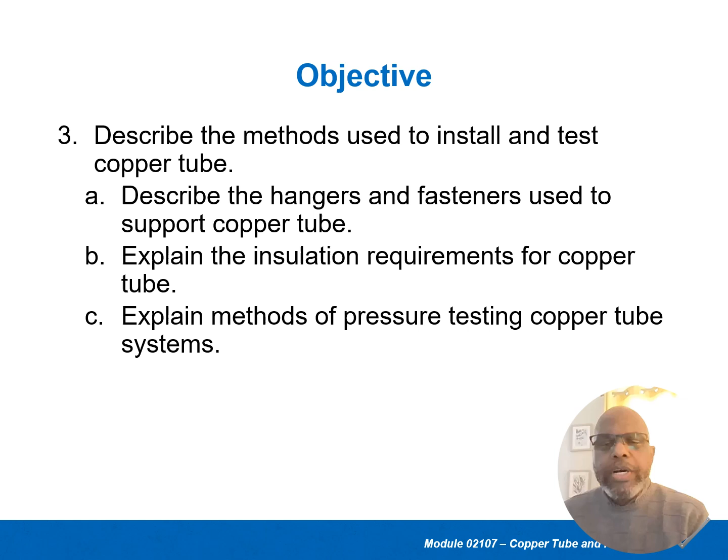And it will be a performance test. We're going to install some piping to go through the process: how to size up, how to prepare the pipe, how to support it and install it inside of walls.

First thing, all tubing must be installed and supported so that both the tubing and its joints remain leak-proof. It must not leak. The worst thing you can have is a water leak inside of a wall after the wall is finished, because, number one, it's hard to find where the leak is coming from, and it's enclosed, making it hard to get into to make repairs. Usually it's surrounded by flammable materials that can catch fire.

If you do it right the first time, you save yourself a lot of problems in the long run. So copper tube is supported in a variety of ways and with various sizes of hangers and supports. Every pipe size has its own special type of hanger to support it based on the size.

We don't want piping moving around in the wall. We want to support it correctly and sturdy, so it's not going to put tension on the pipe, which can cause it to be damaged from the weight. So supporting all types of piping is important. We just don't run the piping without supporting it.

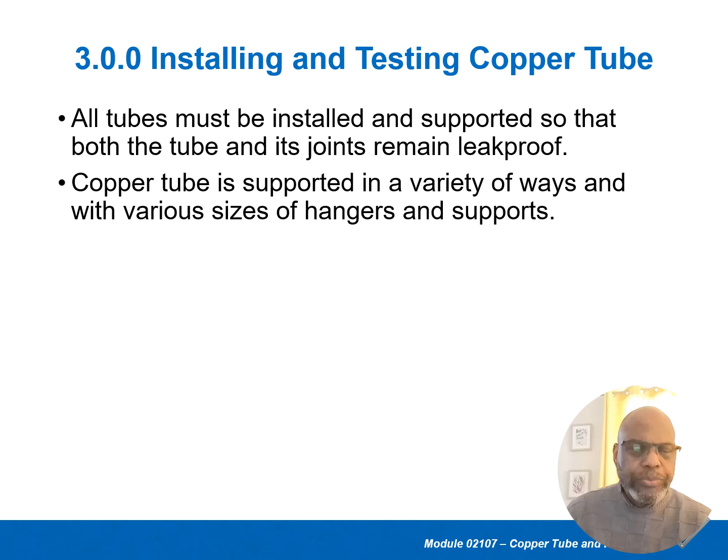When it comes to hangers and fasteners, a hanger is something that's supported and suspended. Fasteners are what could be attached to walls or floors or things like that.

The specifications for hangers and supports are determined by the following factors. First, the combined weight of the tubing, fittings, and valves. In other words, if you are putting in a very large or heavy valve, the supports need to be closer—close to the fitting or close to the valve—to make sure we're not putting stress on the piping.

Next, the maximum weight of the content that the tube is carrying—if it's water, oil, or whatever is going through that piping, or waste. Now, water is heavier than most people think. A gallon of water weighs over 8 pounds—just 1 gallon, over 8 pounds. So if we know how much weight is in that pipe, based on the length and size of the pipe, we can determine how much weight that pipe is holding, and so be able to support it.

Materials such as wood, concrete, or steel that the hangers will be attached to matter. In other words, we determine what type of hangers we're using based on where we're attaching it. If it's steel studs, we need to use a certain type of hanger. If it's hanging from floor joists or ceiling joists, we must use a certain type of hanger or support.

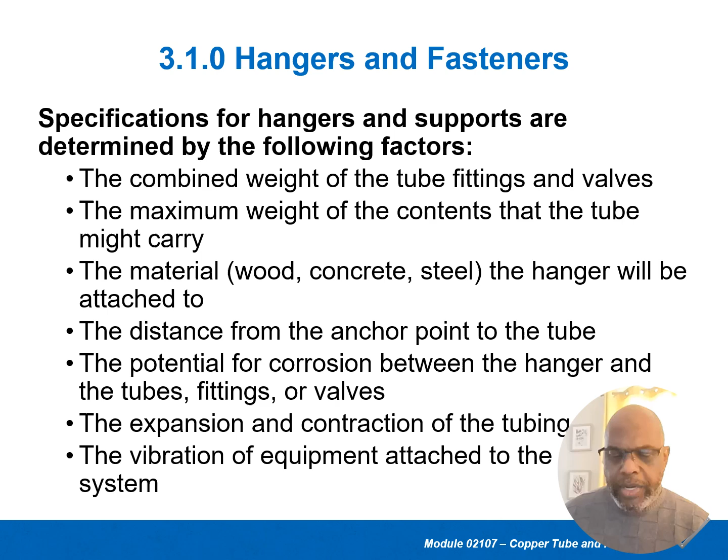Vibration of the equipment attached to the piping system must also be considered. If it's connecting to a piece of equipment that requires water or some flow through it, we must account for that. For example, for refrigeration systems that have a compressor, we actually put extra bends in the piping to allow that compressor to move freely without being hindered by the piping itself, so we're not putting stress on the tubing that can crack or break from vibration.

How do we attach it? Number one, these are different types of clamps. The C clamps don't support the pipe or tubing itself, but they support the hanger that is supporting the tubing. These are what we call beam clamps or C clamps, and they're used to attach a threaded rod or a bolt and nut to hang some type of support from it.

The support on the right side is a one-hole strap. That one-hole strap is designed to hold the pipe against a wall or some type of structure, or a stud. In other words, it supports the pipe using just one screw through the strap, and that strap holds the pipe in place against a surface. The tube is attached to a part of the hanger that touches or connects directly to it. It may be designed for heavy duty or light duty, for covered insulated tubing or plain tubing.

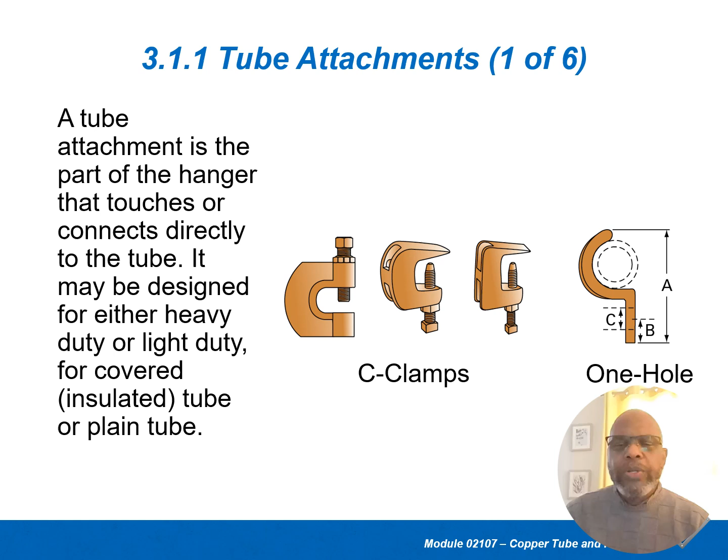So again, there are many ways to attach it, but this diagram shows a couple of different ways to do it. Like the C clamps, it doesn't hold the pipe directly—it holds some type of hanger that will support the pipe, and that one-hole strap will support the pipe directly.

These on the left side we call clevis hangers. We use this for larger pipes—matter of fact, they make it for smaller pipes too, so it's not just large pipe. Usually at the top of it, this is where your threaded rod will go, and that threaded rod will be connected to one of those C clamps, which we call beam clamps.

So that rod could be 10 feet long and hanging from a beam, and this is what holds the pipe. The pipe sits inside this space, and it's movable—it's not holding the pipe solidly or secured. In other words, the pipe can actually move back and forth a small amount if there's expansion or contraction. We use this when we hang a pipe above the ceiling, above your head.

This is a very common type of clamp. If the pipe is insulated, we just use a larger clamp that fits around the insulation of the pipe. Again, it's not physically holding the pipe stationary—the pipe can move back and forth slightly if there's any vibration or expansion or contraction of the piping.

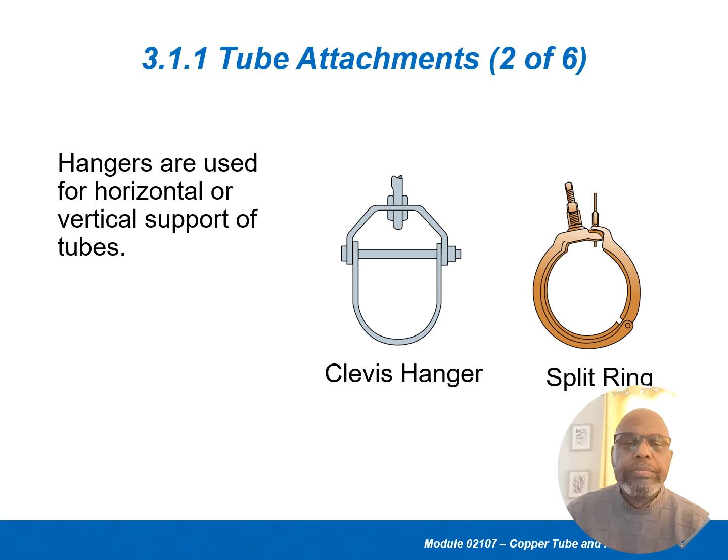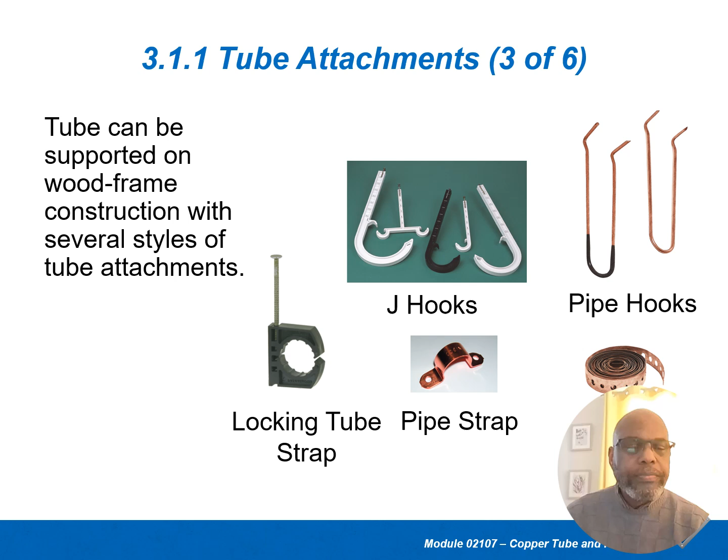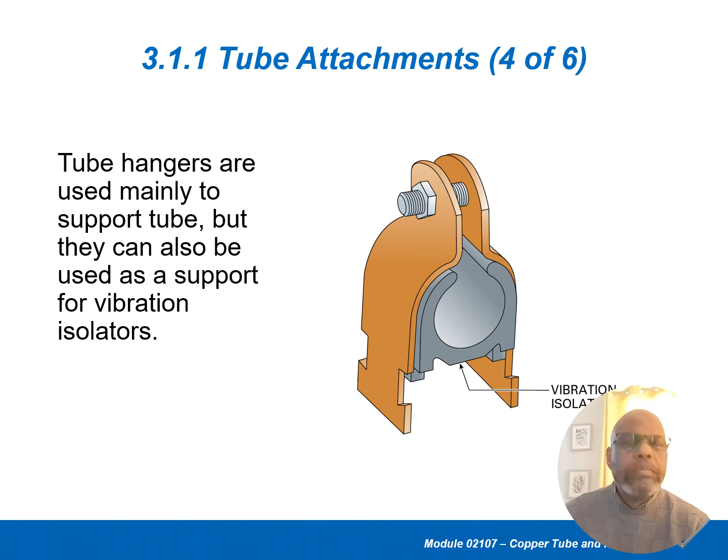Now this is another type of clamp you find. This is a vertical hanger, and basically it straps around a pipe. It's usually used when the pipe is vertical, going up and down, and it will support the weight of that pipe instead of forcing the weight at the very bottom, which can cause a lot of stress and can damage or crack the pipe.

So this will clamp around the pipe and hold it, and you can use these ears on the side of it to be able to hold that pipe in place. So again, you size these type of straps based on the pipe's size, and they make a different clamp for every size. It will use bolts and nuts here and here, and once you close it up all the way, it will hold that pipe tightly. So it doesn't matter how large or heavy that pipe is, it will be supported around using that clamp, not the weight on that fitting at the very bottom.

So vertical hangers are also called tube riser clamps. They consist of a friction clamp that can be attached to structural site components to support the vertical load. The load is the weight of the tube. Again, there will be some type of support underneath one of these ears.

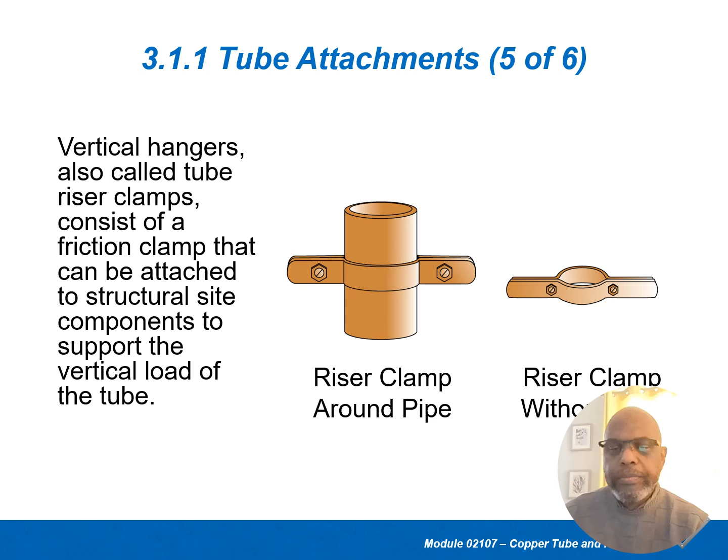Here's another one. This is definitely found in refrigeration systems, and it's a special type of clamp. It looks very similar to a clamp that you would use on a unistrut system, only different. This doesn't have those clips on the bottom to support it. Other tubing attachments include universal tube clamps and standard clamps, but it has these channels and things that we use. That's the unistrut I was explaining, which will support the piping.

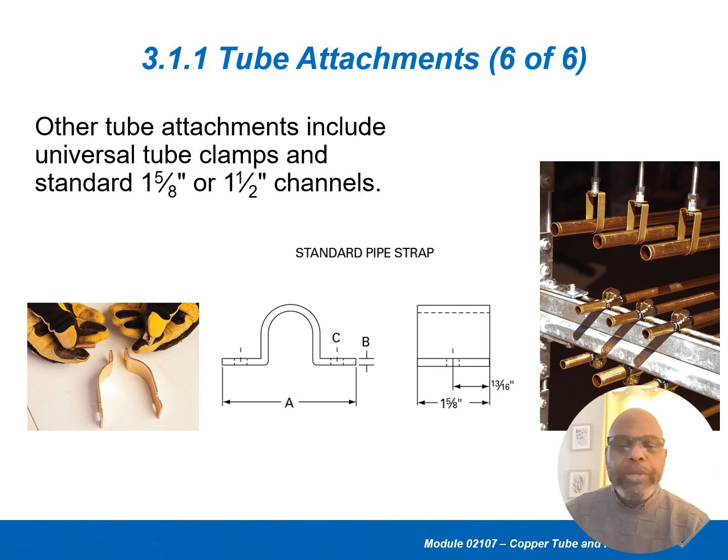Here's another one. This is like a clevis hanger that goes around copper pipe. It's copper clad, covered with copper, so it doesn't have that electrolysis. This is definitely from a refrigeration system, for example a supermarket refrigeration where they have what we call a rack system, and all the piping, multiple pieces of tubing, sets of tubing, will be coming out of this system like this.

Connectors. The connector section of the hanger is the part that links the tubing attachment to the structural attachment. Again, we're talking about the unistrut. I'll see if I can send a video about unistrut and how to use it, because that's a common thing you'll find in commercial applications. I'll go through the steps, and hopefully the video shows more. So the connector section links the tube attachment and the structural attachment. The structural will be the strut.

Connectors can be divided into two groups: rods and bolts, and other rod attachments. We're talking about the threaded rod. The rod attachment includes eye sockets, extension pieces, rod couplings, reducing rod couplings, hanger adjusters, turnbuckles, clevises, and eye rods. All of these are different things for threaded rod connections used to connect everything together. There are many different parts. The video about unistrut may show you all the different configurations of components you can use.

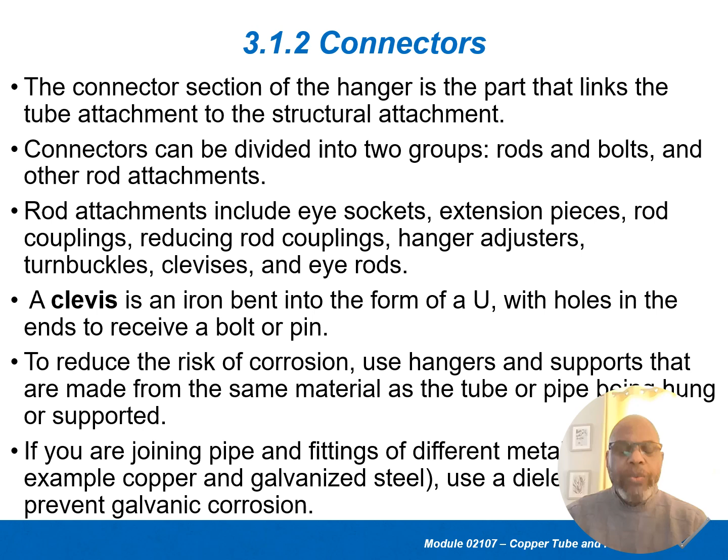If you are joining pipe and fittings of different metals, for example copper and galvanized steel, use a dielectric union to prevent the corrosion that will occur on the pipe.

Here are different types of clamps you can use. For example, these are concrete anchors. Here's toggle bolts - here is the head of it. Basically, we buy these and add the length of screw that we need, and usually the screw is long. It's long for a reason, because when you fold this up, it has to penetrate the drywall.

This, like I said, I call it a butterfly. You can fold it up so it's flat against the bolt, then slide it through the wall. Once it goes completely into the wall cavity, it pops open - it's spring loaded - and then you can tighten the screw up. So that bolt must be a lot longer than you need.

Other types include these plastic toggle bolts. This is a lead shot - a drop-in that you actually drop into the drilled hole. You drill the hole exactly the size you need, then hammer this nail in and it will expand and hold it down into concrete. It works very well; we usually use it on concrete floors.

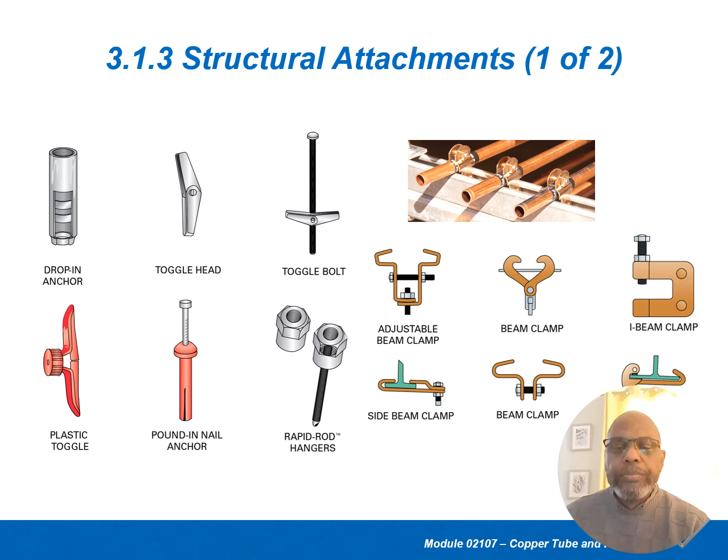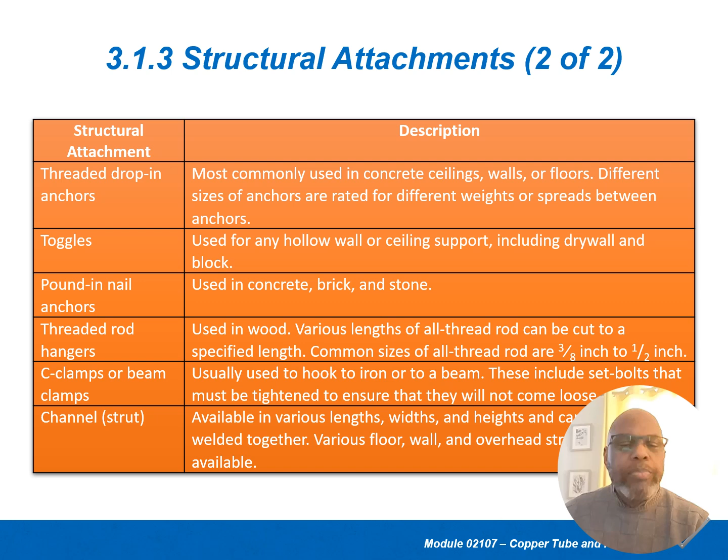So there's a list and a little chart that goes into the structural attachments and the way to install it, the purpose of it, and the application to use it for. Study this chart - it's in your book. Go through it so you get a good idea of the processes of different types of supports.

One thing we have to do with copper, especially when we've got things at different temperatures, is insulate the tubing. If something is very warm or very cold, it should be insulated. If you need something warm, insulating the pipes maintains the temperature so when it gets to where it's going, it's still holding its temperature. Same thing with something very cold.

However, with something cold, it can freeze up or sweat, and that can cause problems because it can drip and cause floor or ceiling damage. So we insulate the piping for two reasons: for cold, to keep it from condensating and gaining heat, not losing heat. When the pipe is cold, it would actually absorb heat, and when it gets to the finished end, it'd be warmer than you want it. But something very warm would lose heat, so the insulation allows it to maintain its temperature.

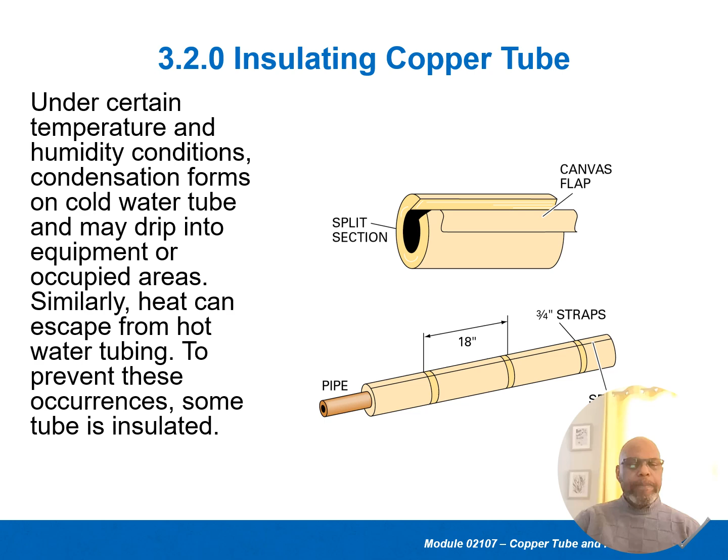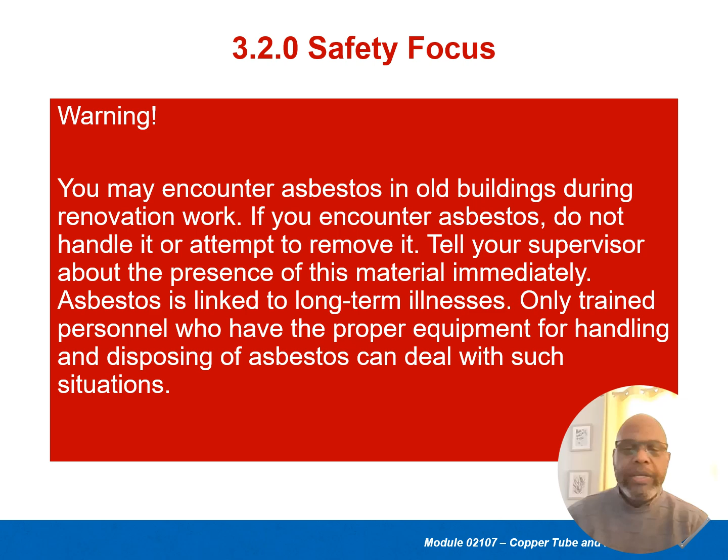Safety focus. Here's a warning: you may encounter asbestos in old buildings, especially during renovation work. If you encounter asbestos, do not handle it or attempt to remove it. Tell your supervisor about the presence of this material immediately. Asbestos is linked to long-term illnesses and lung diseases. Only trained personnel who have the proper equipment for handling and disposing of asbestos can deal with such situations. In other words, you'll call a company out to handle that. If you haven't been trained in it, don't deal with it because it's not safe for long-term health.

Now, once you install the piping, did all the soldering, and the pipes are supported, before you put it into use you must test it to make sure there are no leaks. Typically we can use either air or nitrogen to pressurize the system. We never, ever use oxygen in a pipe to check for leaks. Number one, oxygen is an accelerant—it can cause anything that is burning to burn more rapidly and violently. Matter of fact, breathing pure oxygen is even not good for you.

Once an installation is complete, you must pressurize and pressure test the system for leaks to be sure all connections are secure. The system must also be inspected to make sure the work has been done according to job specifications and applicable codes. Matter of fact, that should be done before you pressure test the system—in other words, it should be inspected, checking your joints. Every time you make a joint, you need to inspect it. You get a mirror and a flashlight and go around your fitting to inspect it and make sure it's done correctly.

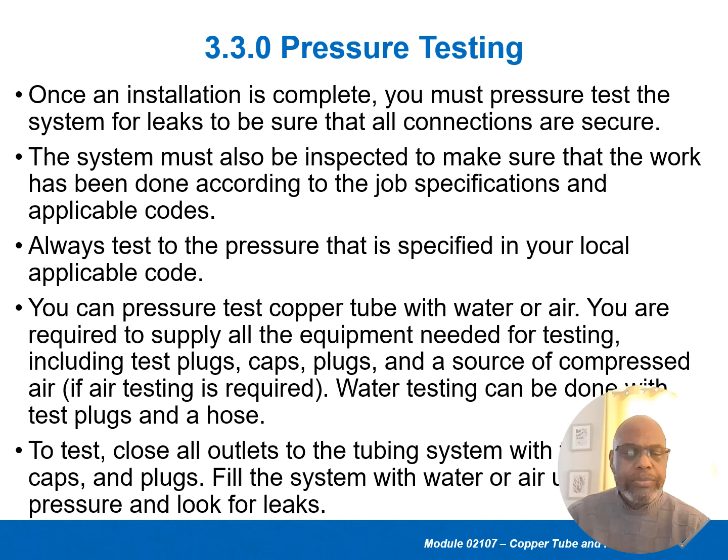Pressure test for DWV systems. You can water test it, but that might be more difficult because the DWV piping is large. It would take an awful lot of water. It's easier to use compressed air.

But to water test a DWV system, refer to your local codes for the required pressure and water head. Again, you have to add an awful lot of water to be able to do it. Here's the thing, you don't have to cap the very end of it, as long as you didn't complete the final connection. You can add water to it, make sure everything is stubbed out. When I say stubbed out, the piping where your sinks and toilets and things is closed off, capped off, where no water or pressure can escape.

Then you can fill the stack pipe, the pipe going outdoors, and you actually raise it up to a certain height, and you have a pressure gauge at the very bottom of the system, and you record that pressure. The vertical rise in a water tube will give a pressure reading.

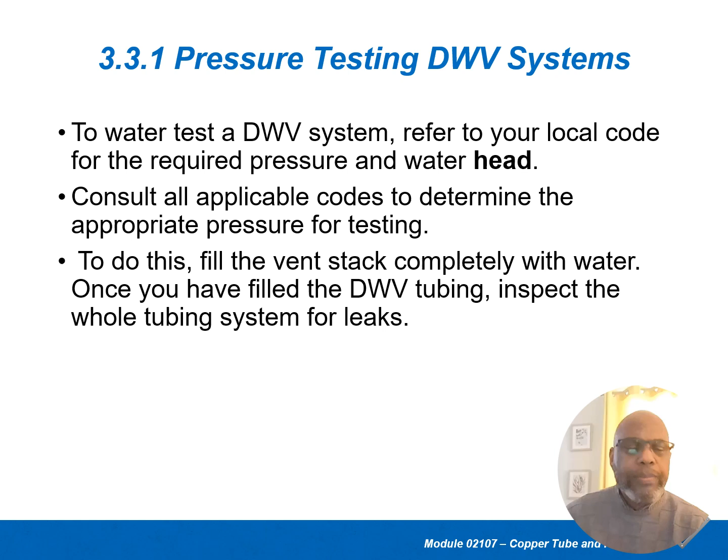So, pressure testing a water supply system. To water test a water supply system, close all the outlets, all the valves, and fill the system with water from the main.

Next, you're going to inspect the system for leaks or other problems. Where codes specify water testing at pressures higher than those available from the normal water system, which is around 45 to 55 psi - that is normal for a standard supply water system - but they want you to test it at 100 psi, because you will be able to find leaks faster. The higher the pressure, the faster you will find the leaks. That's about twice as high as the city will supply you.

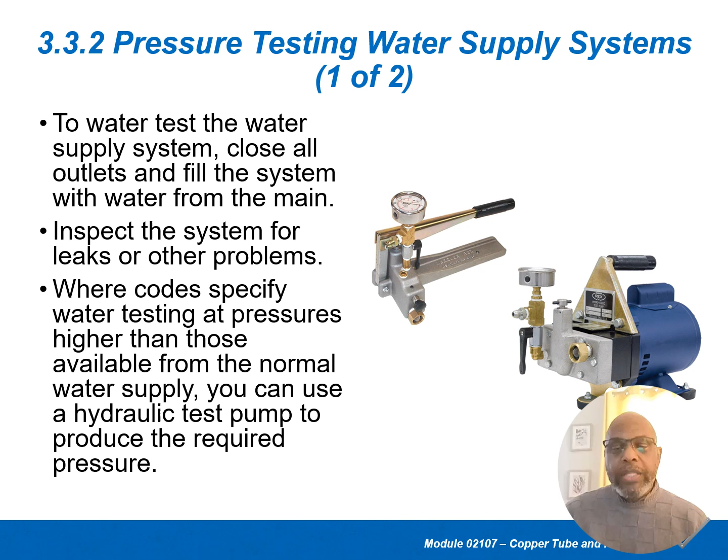So where the codes specify water testing at pressures higher than those available from the normal water supply, you can use a hydraulic test pump to produce the required pressure. Basically, if you notice, this one here has a gauge on it. You just pump it up, and this is an electric pump that can increase the water pressure for you.

To air test a system, the plumber or inspector fills the tubing with compressed air. By using a pressure gauge at the test plug, the plumber or inspector can determine if any pressure is lost somewhere in the tubing. Keep this in mind: you can find a leak faster with compressed air than you can with water, but you can find it either way.

Another useful method of identifying leaks, if using air, is soap bubbles. Every joint is covered with soap bubbles, and you will find a leak instantly. So if there is a leak in the joint, bubbles will form at that point. And here's the great thing about it: you know exactly where the leak is at. That's why I like using air, because you can look for water leaks, which is a telltale sign too. With air, you can use bubbles.

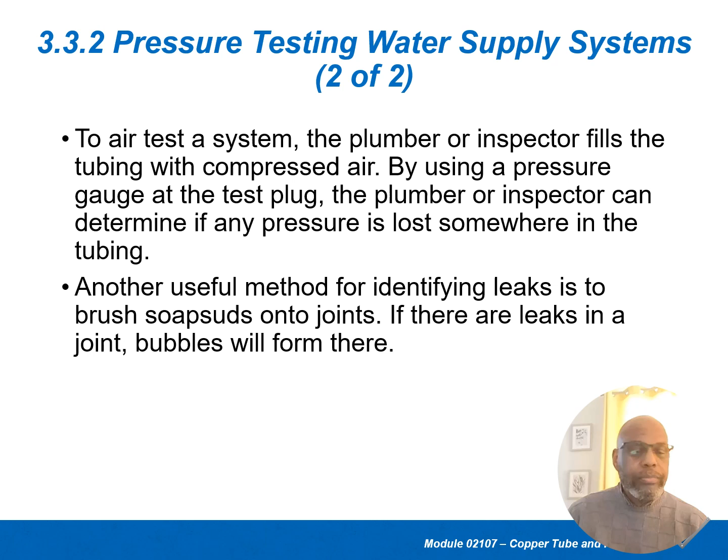All right, here's some terms that we're going to go over. A clevis is a type of strap that is a U-bend. Insulation is a substance that retards the flow of heat, in other words, slows it down for either gaining into the pipe or leaving the pipe.

Head: a head is basically the vertical rise in a column, which causes a downward pressure. So again, for every pound of pressure, that would give us around 27 inches of vertical rise. In other words, if you push water up, or you have 27 inches of vertical rise, that will give us 1 pound of pressure.

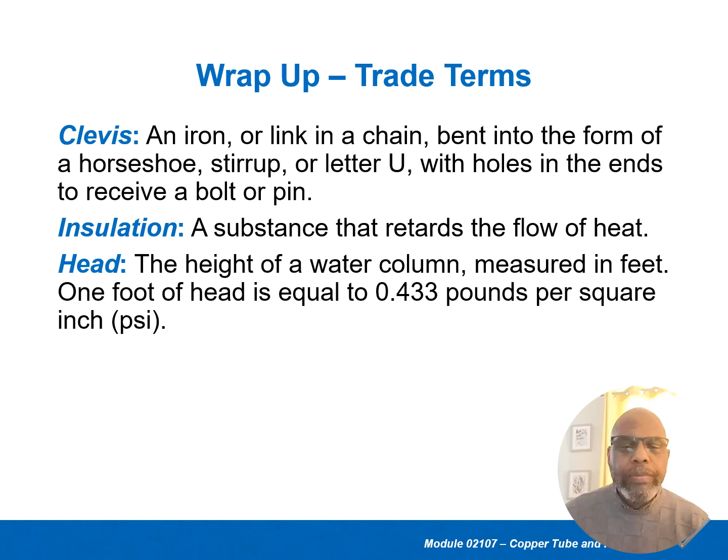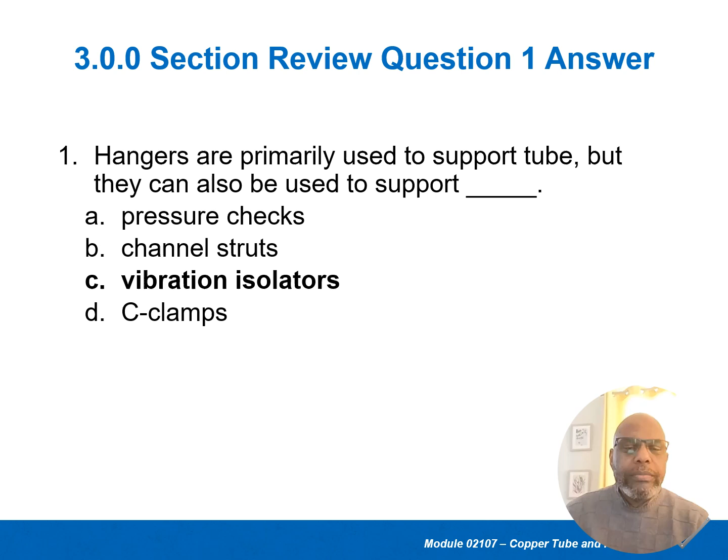All right, some questions. Hangers are primarily used to support tube, but they can also be used to support blank. Is it pressure checks, channel struts, vibration isolators, or C-clamps? Hangers are primarily used for supporting tube, but can also be used to support vibration isolators.